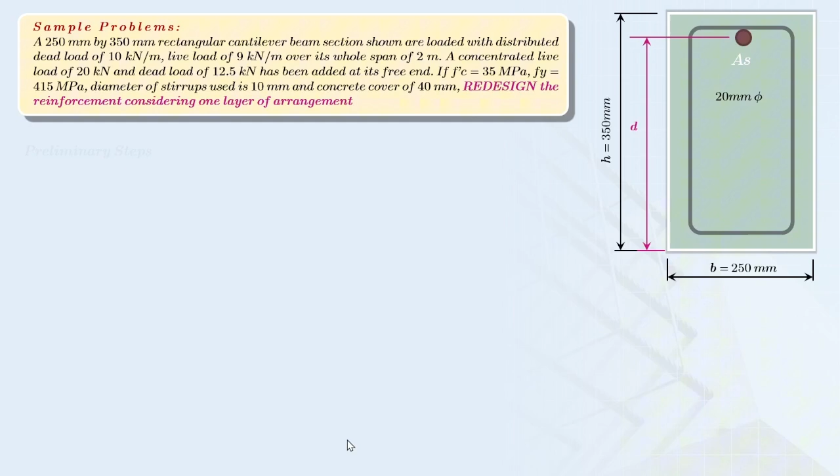So mabalik tayo. We need to determine the effective depth. Best to assume that this is single layer so that we will use this formula para makuha natin yung location muna ng centroid, considering that we have concrete cover, diameter of stirrups, and the diameter of our main reinforcement. So substitute everything, and ang makukuha natin ditong effective depth is now equal to 290 millimeters.

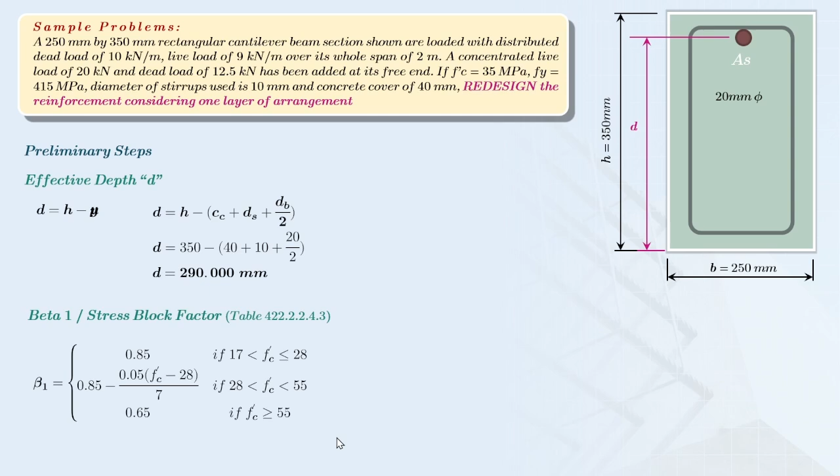Of course, part rin ng ating design is the value for our beta 1. Our beta 1 here depends on our f'c, and our f'c here is 35 megapascal. So it will fall under the second condition natin, and by utilizing this formula, ang makukuha nating beta 1 is now equal to 0.8. So, we can now proceed in the determination of our design strength moment. Kasi, class, hindi given dito yung bending moment directly. Ang binigay lang sa atin is the condition of our beam.

If we consider first our load types, meron tayong given na uniform load, and we have two load cases here, which is the dead load and the live load only. So para makuha natin yung ultimate uniform load, we need to determine it using this load combination. By simply substituting yung ating dead load and live load, ang makukuha natin ditong ultimate uniform load is now equal to 26.4 kilonewton per meter.

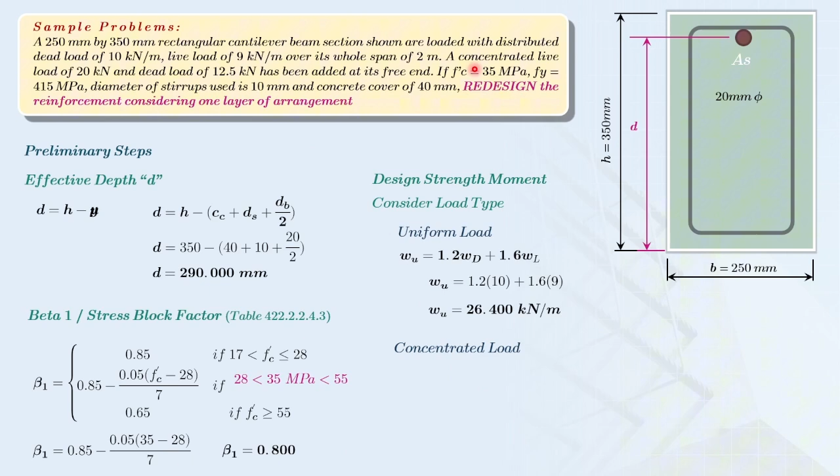Ganun din yung gagawin natin for our concentrated load. Since yung given ulit is dead load and live load only, same pa rin yung load combination natin: 1.2 dead load and 1.6 live load. So ang makukuha natin for the ultimate concentrated load is now equal to 47 kilonewton. Ngayon, ito na yung magiging challenge sa sample problem na ito. Kailangan natin kumuha ng ultimate bending moment, which is the maximum value of the moment under the ultimate condition or considering the factored loads.

Ang pwede nyong gawin dito, pwede kayong gumamit ng moment diagram. Kaya lang, from the previous sample problem, para mas mapabilis tayong kumuha ng ating ultimate bending moment, especially kapag ang given is a cantilever, alam naman natin na ang maximum bending moment ay nagaganap palagi sa support. So why not utilize the summation of moments sa ating support? So we will use this formula. You may take your time para ma-derive yung ating ultimate bending moment sa support.

So let's try to substitute it. Ang makukuha nating ultimate bending moment, or the demand bending moment that we will use sa ating design, is now equal to 146.8 kilonewton meters. So ibig sabihin, sa redesign portion natin, ang basehan ng ating number of reinforcement ay manggagaling dito sa bending moment na ito, which is 146.8 kilonewton meters.

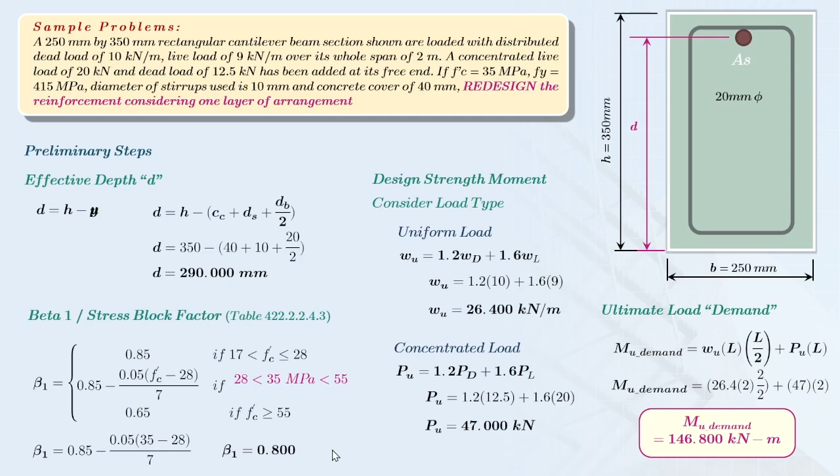Okay, so ulitin ko, ito yung magiging value ng ating load demand. So ibig sabihin lang nito, we can now proceed for our steel ratio limits. Kasi importante na makita natin if the section can qualify as a singly reinforced beam or a doubly reinforced beam.

So of course, tignan muna natin yung ating maximum steel ratio, which is based on this derived formula. And then substitute lang natin. Direct substitute lang naman yung mga given natin so that our maximum steel ratio is now equal to 0.0246. So ganun din yung mangyayari for our minimum steel ratio.

So of course, dalawang minimum steel ratio yung kailangan nating i-determine. And under this first minimum steel ratio, ang makukuha nating value dito is 0.0036. Ganun din yung gagawin natin for the second minimum steel ratio, so that our second minimum steel ratio is now equal to 0.0034.

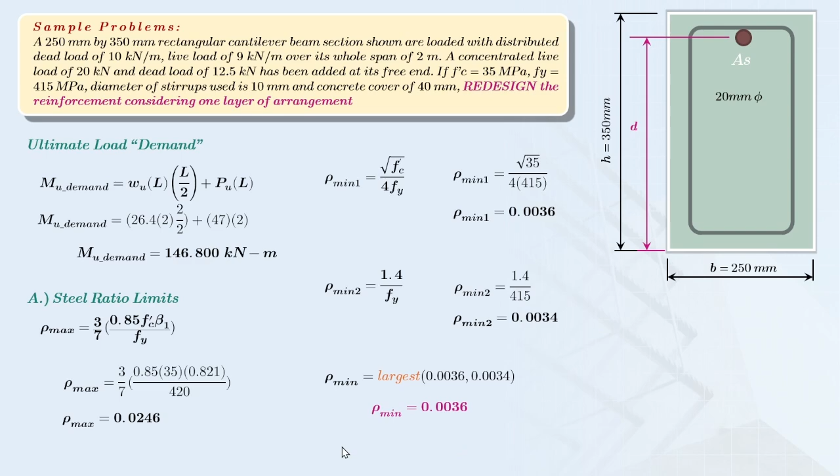Okay. So sa ating minimum steel ratio, since dalawa yan, kailangan nating mamili ng isa. It should be the largest among these two values. And very obvious that our minimum steel ratio is now equal to 0.0036. So ano lang ang ibig sabihin niyan? Ang ibig sabihin lang po niyan, class, is ito na po yung gagamitin natin as the value for our criteria.

Para kapag nakuha na natin yung ating actual steel ratio, we can now compare on these two limits, lalo na dito, in comparison with our maximum steel ratio. Kasi once again class, kapag lumagpas po yung ating actual steel ratio sa maximum steel ratio, ibig sabihin lang po nun is magiging doubly reinforced na po yung ating beam. But tingnan muna natin.

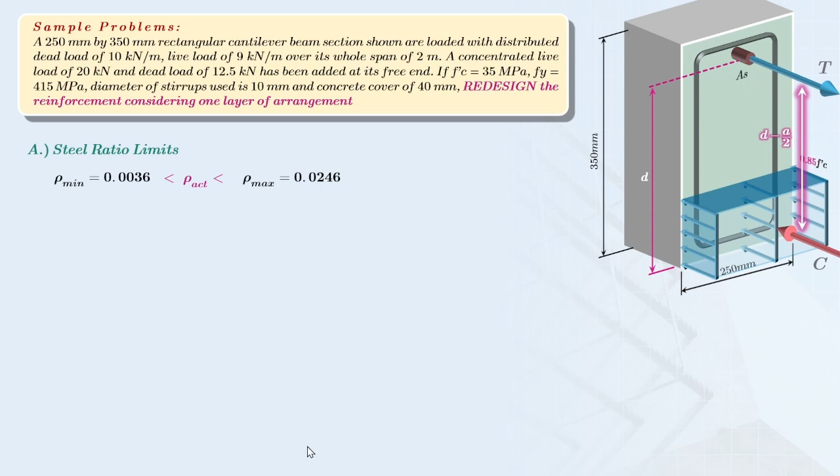Kasi dito tayo next na gagawin, which is the determination of the actual steel ratio, using this derived formula, and substitute na natin yung given natin. Please take note, ang goal natin sa singly reinforced beam in the design ay dapat makapag-design tayo ng tension controlled section. So ibig sabihin lang po nun, dapat ang gagamitin nyo ditong strength reduction factor is equal to 0.9.

Okay? So solve lang natin ito class at ang makukuha ninyong actual steel ratio is 0.0221. So let's compare with our minimum steel ratio and the maximum steel ratio. And it finds out na in comparison with our minimum steel ratio, hindi pa bumababa yung ating actual steel ratio.

So okay po yun. In comparison with our maximum steel ratio, as you can see here, hindi pa lumalagpas yung ating actual steel ratio sa maximum steel ratio. That's why we can qualify this section as the design for our singly reinforced beam. By the way, please take note na yung ating tension ay nasa itaas, so andito yung ating main reinforcement. And then yung ating compression ay nasa baba, so yung kanyang compression block ay nasa baba rin.

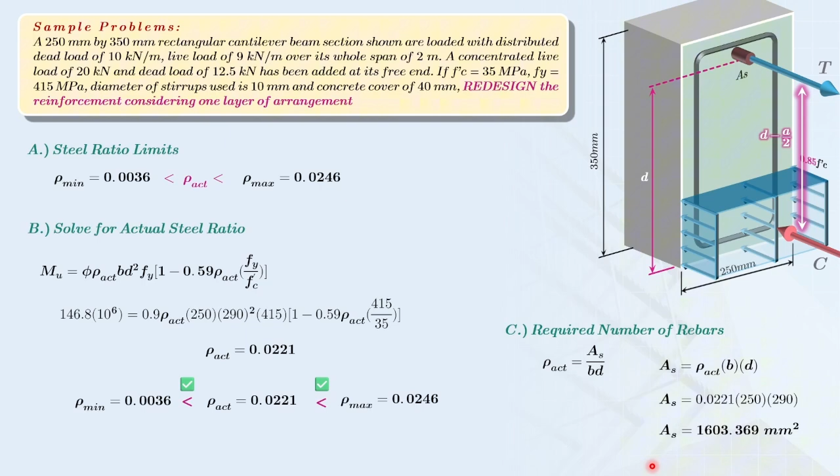So now, let's determine how many reinforcement will fit in our beam. We can use yung ating formula for the steel area or total area for our tensile reinforcement. So substitute lang natin once again, and ang makukuha natin dito for the total steel area is now equal to 1,603.369 square millimeters.

Kapag nalaman nyo na yung total steel area, pwede na nating malaman kung ilang reinforcement yung magkakasya sa ating tension. Using this formula, i-divide lang natin yung total steel area sa area ng isang 20 millimeter bar. So ang makukuha natin dito for our number of 20 millimeter diameter is now equal to 5.104.

Kaya lang, class, ang gusto natin maging value dito ay exact. So we need to round it up, so ang gagamitin natin for our main reinforcement is 6 pieces of 20 millimeters diameter. So ibig sabihin lang nito, sa given dito kanina, ideally, hindi ka na dapat magdalawang layer. Kasi kapag nagdalawang layer ka, baka mag-fail yung capacity versus load demand natin.

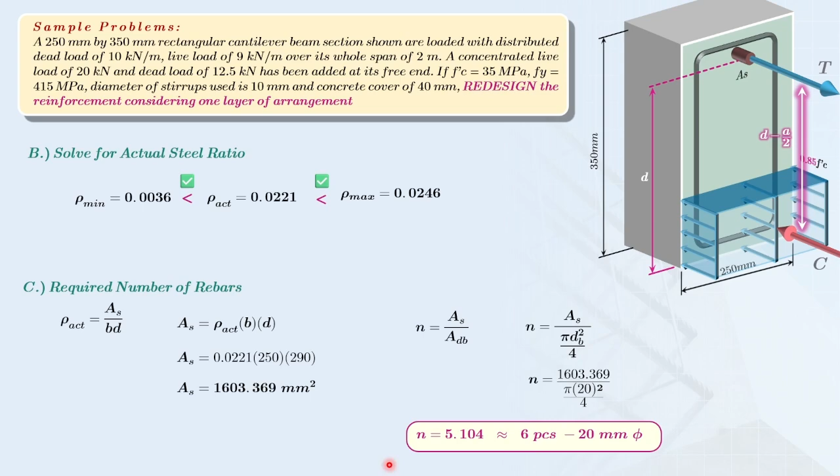So para ma-retain lang yung ating dimension, rearrange lang natin itong section into a single layer so that ito ay magiging 6 pieces of 20 millimeters diameter, para ma-accommodate niya yung load demand coming from this loading sa ating cantilever.